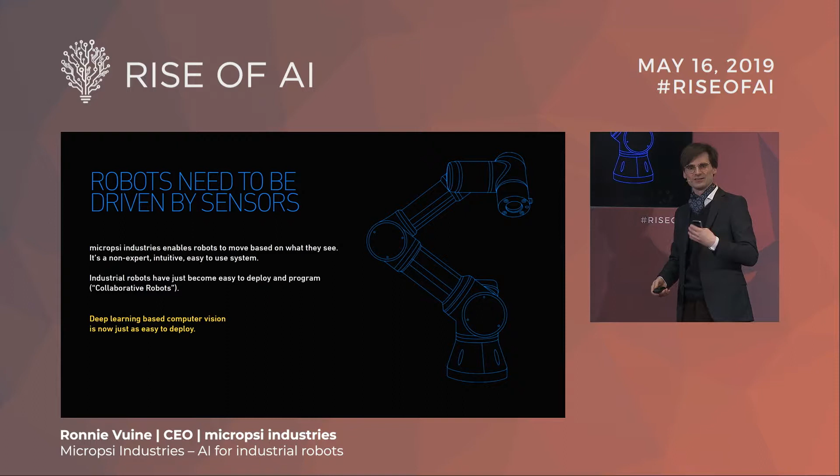And then after a couple of hours of demonstrations where the robot makes the movement with the trainer and us watching, the data gets sent off to the cloud, and back comes a policy that knows how to make the right movement given any of the images that you show. And the robot can make this very complex, real-time correcting movement on its own.

So before I show you an instance of this, I will have to do a great deal of explaining of what it is that we're doing there, because production is always very special. Just the general setup of the system: you buy a robot, any robot, we don't make the robots, right?

We're a software company. You buy a robot, for instance, from Universal Robots, you buy a force torque sensor so you feel the forces on the wrist, you get a camera from us and any type of end effector. You connect all these, and there's a tablet app, and it's really simple to use. Anybody in this room could train a robot to do a very complex movement and to solve a very complex computer vision problem in production. It's really, we made it super simple to use.

You connect all these, you do 2 hours of training, wait a night, try it out. Typically, you iterate this 2 or 3 times, and you're done. You have a very complex, real-time controlled, vision-driven system that knows how to find and position an end effector towards a visually perceived goal. Okay, this was all the technical terms in one sentence.

So we've done that. Let's maybe move over to the video so I can show you how this actually looks when you do it. So while the video starts playing, I'm going to explain to you what we're doing there.

Imagine you're a factory and you make fridges, refrigerators, and you're a premium brand, so you don't want them to break. The premium brand we're working with here is Liebherr. What you need to do is make sure no coolant leaks out of the cooling system after production, because if some coolant leaks out after 4 weeks, the fridge will break.

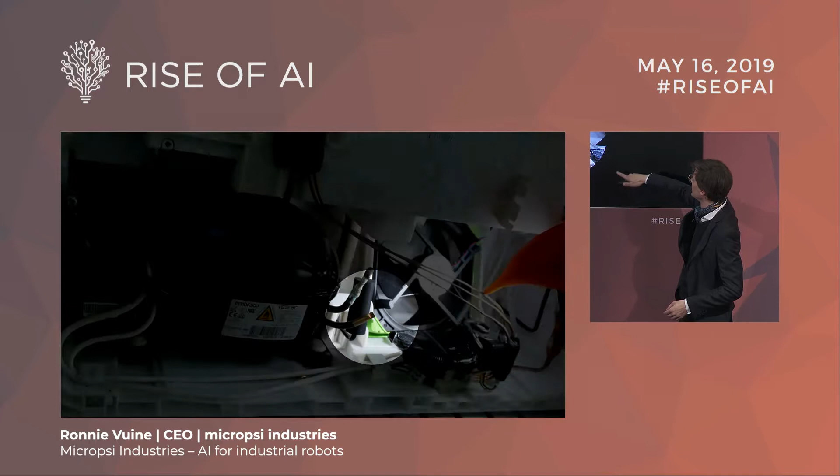We highlight them now, right? These connections, you don't know exactly where they are, you don't know exactly how they look, and some poor dude, his job is to put a sniffing probe, that's a little artificial nose, to any one of those soldering points and try to sniff if some coolant is leaking out there.

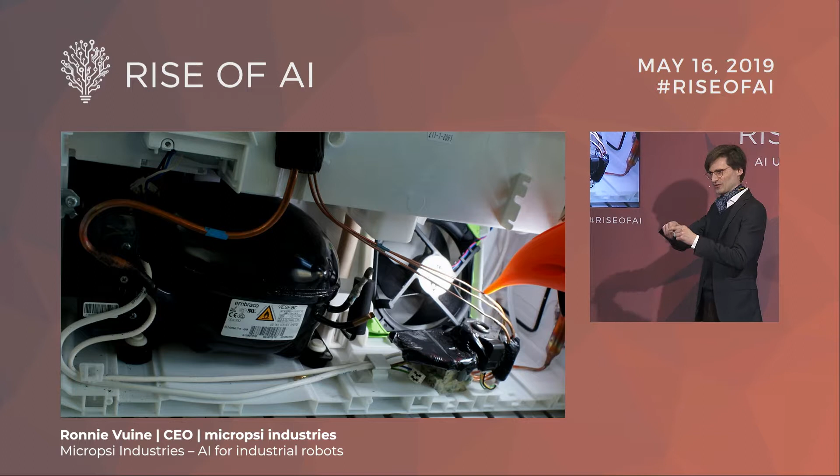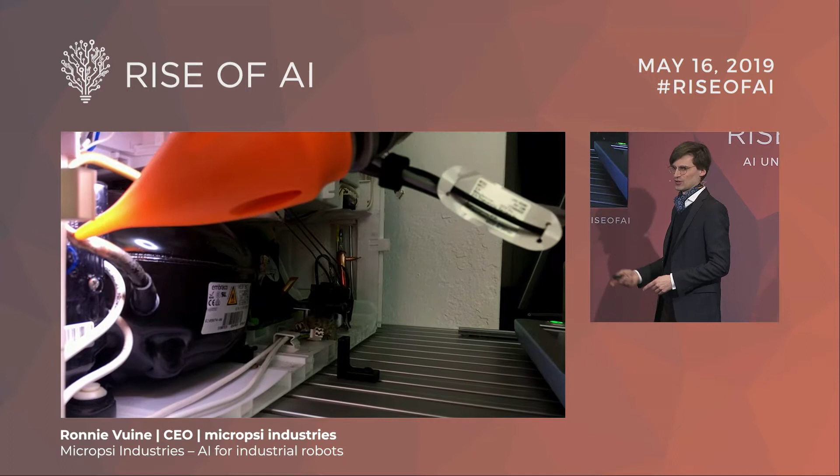Nobody wants to do this, and of course after half an hour they get very sloppy. So Liebherr have tried to automate this for I think 20 years or so, and many people have failed. Now, with collaborative robots and our product Mirai, this was a matter of a week of training the robot.

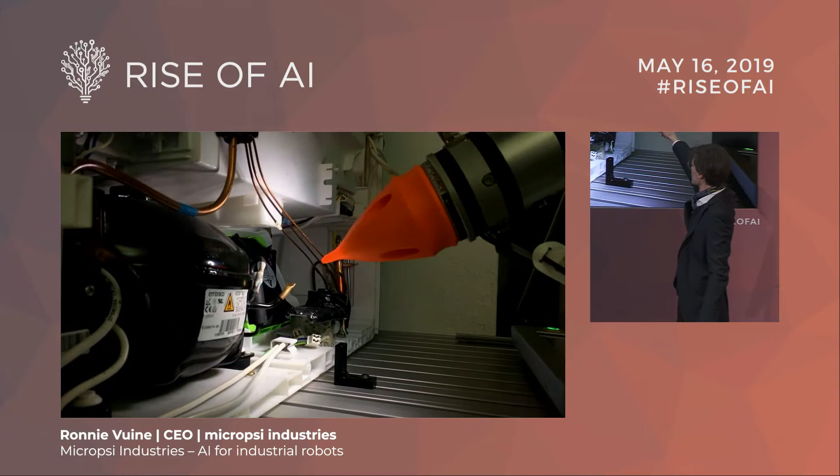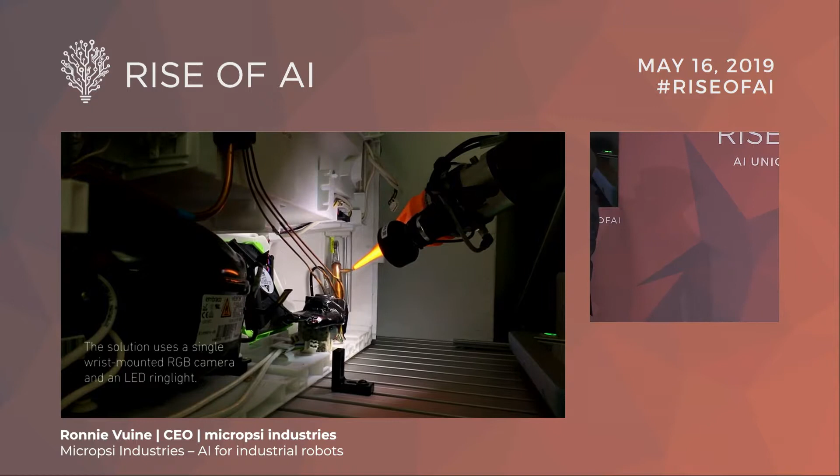So what you're seeing here is a robot. We're quite close, right? This is like this big in reality. This is a simulation of the sniffing probe. We call it den Ameisenbären, you can see why. And this is the camera that watches the scene, and this is the back of the fridge.

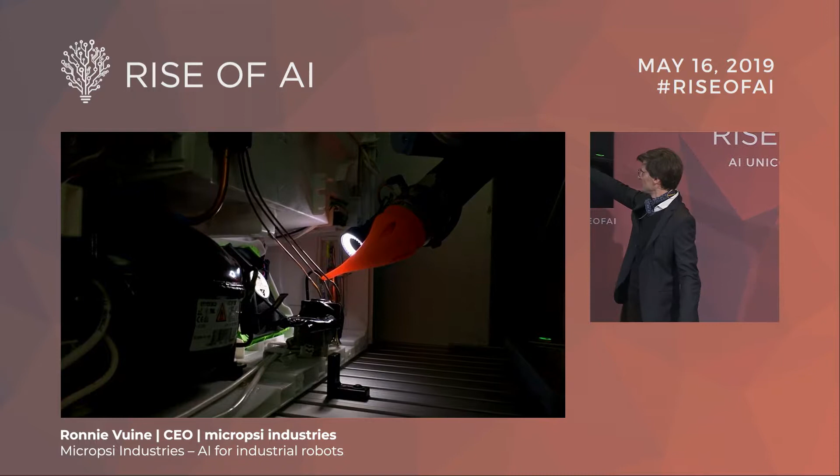With a single RGB color camera, we're going through these movements. So what we did is, for each of the individual joints, we trained the robot to find it and touch it, no matter what it looks like and no matter where precisely it is. We know roughly where it is, right? There's a ball in space where it's going to be, because most of these fridges are similar when we know the model. But really...

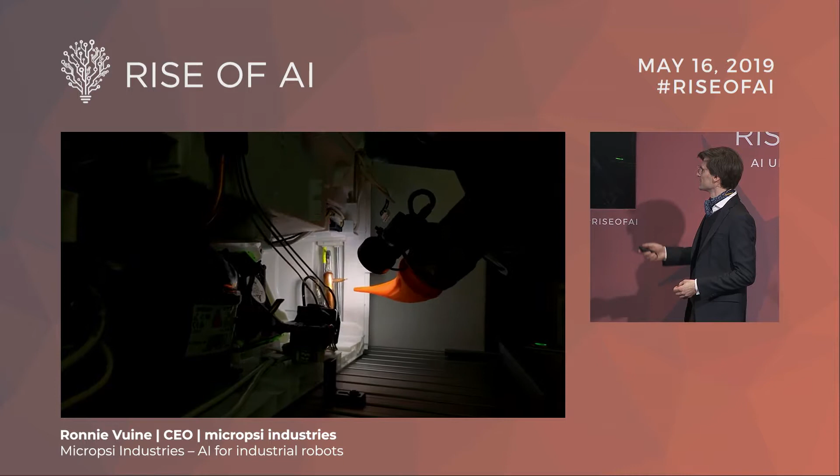The last 2 centimeters of the movement are guided by the camera, and are literally movements like we would make them when we plug in a cable or when we touch one of these things. And the cool thing is this is real time, so you can really mess with the robot as it tries to touch these things, and that's what we're doing in the next 30 seconds.

Right, so this robot just tries to touch the soldering point, and now I'm just wiggling it about to show that that's all this robot wants to do at this point in time. It wants to stay there and sniff it.

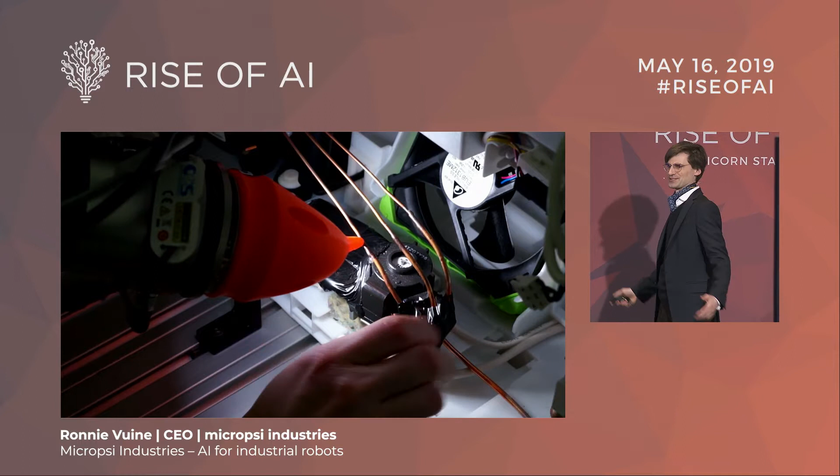That's what's going on. So normally robotics people get very excited at this point because that's completely unheard of and nobody's seen it. Real-time control from cameras with a closed-loop control system is not something that anybody outside research is doing, and we've just productized it. Right now, I believe we're the only people in the world who can do it, especially as a product.

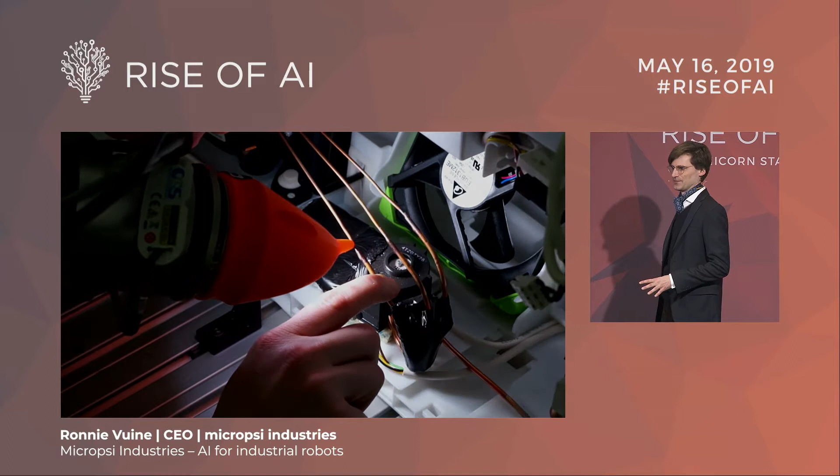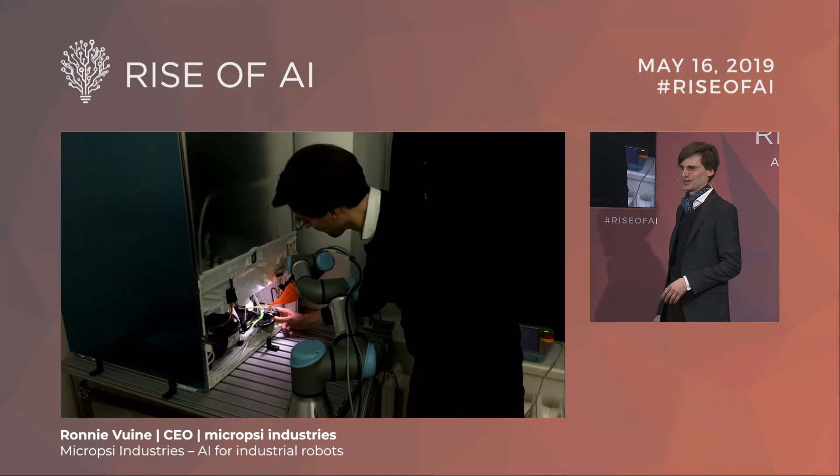And then, while we're messing with the robot anyway, I just said okay, then let's mess with the whole fridge. That's not something that would happen in a factory, and see if it still performs and finds the goal. So that's what's happening here.

Yeah, we need to wait for the video to catch up with me. Right, so robot wants to touch, and then I decide okay, let's move that thing about, and it just does it. I think we'll see one more example of this. It moves to the right.

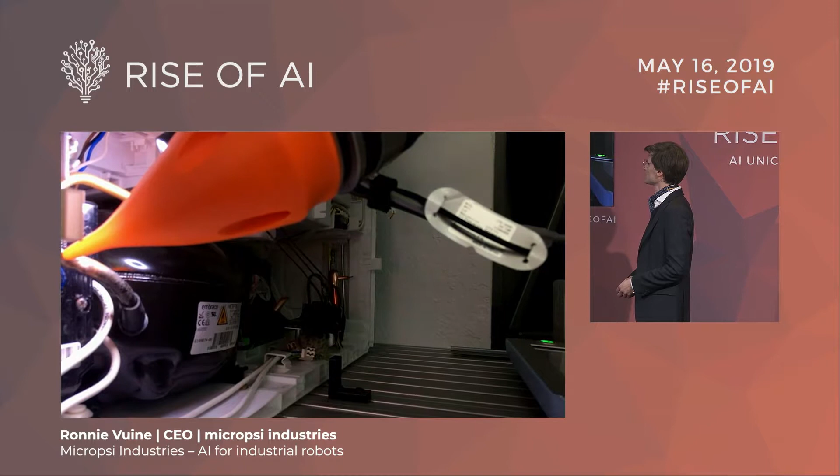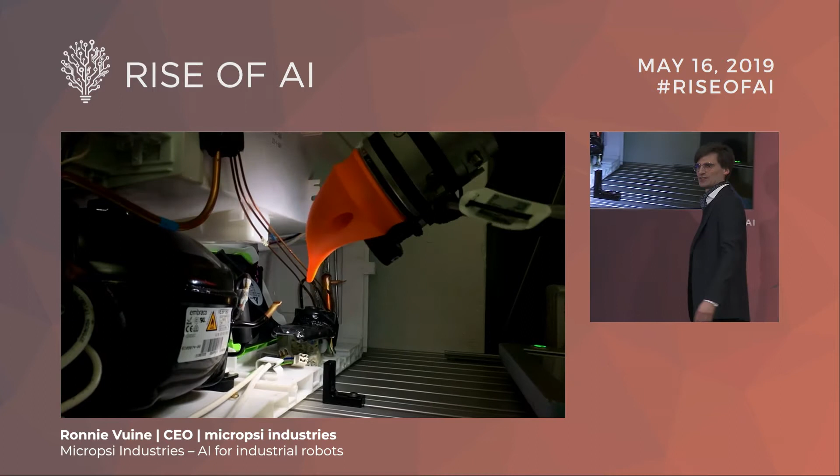Yes, and now I just hit it hard, and the robot, it needs to go here in this case. Right, and it just approaches, and even as we wiggle it while it moves, we go there. Okay, the rest is technical stuff and boring, so we should go back to the presentation.

So this is not about sniffing fridges. The world market for the sniffing fridge application is maybe 15 installations. I mean, there's one at Liebherr-Miele, there's one at LG, there's one at Whirlpool. We're talking to all of them after we've done that.

So this is not what it's about, right? This is a highly horizontal product. It's as horizontal as universal robots themselves are. What we do is we take the AI to the actual factory, record the data on site, and solve whatever the movement problem that they have there is.

So we're not, unlike Alexa, where Amazon has trained something and deployed the result. What we're doing is we're deploying the learning system, take it to the factory, record the data there in a very specific manner to the workplace there, the lighting conditions, that there may be oil in the air and chickens running around in the background. You don't know, right? Any of these variants we learn to deal with on site. Record the data, bring it back to the cloud, create a policy, install it on the robot, and have it work. And this works for essentially anything where you need to hand-eye coordinate a movement.

So the way we sell this is we go to a factory and we go to the production engineer and tell them, okay, now let's go through the factory and you show me the people you keep around where you didn't automate. The people you keep around is exclusively for their ability to coordinate how they move with what they see. Because all of this could be done with a robot instead of a person.

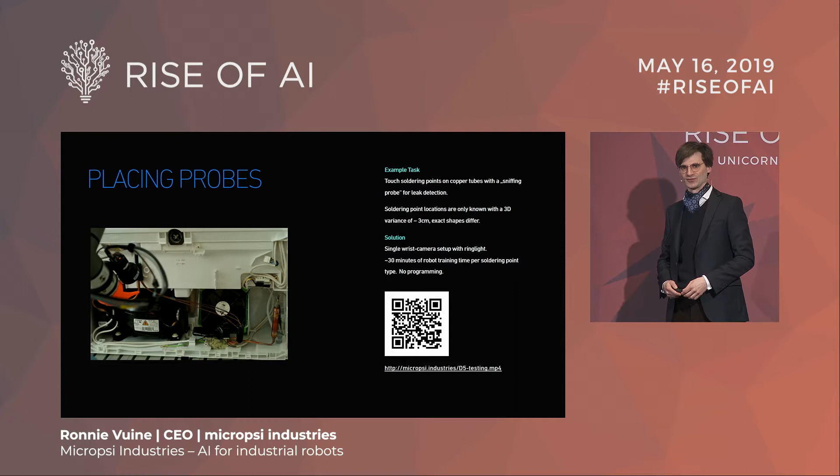We can do this with essentially all the Universal Robots machines. There are 6 of them right now, 3 different sizes, and then slightly different equipment.

If we need more speed, more power, and a bit more danger, we can also do this with ABB robots. We're in no form bound to collaborative robots—it just happens to be the case right now. The market is crazy about them and buys Universal Robots in large numbers. So most of the requests we get today are not for traditional ABB fast machines, but for non-dangerous Universal Robots machines.

Two words about the company. We've been founded in 2014. We're sort of a weird animal.

We're really AI people. So the discussion about artificial general intelligence and how to make language understanding, or understanding anything at all instead of just predicting stuff, is really close to our heart. And it's really long-term what I want to do in my life. This is essentially a vehicle for me to make some money on the side.

We spent 2 years, between 2014 and 2016, figuring out how doing AI in Germany makes sense. If you do AI and you have a bunch of good people and a bunch of algorithms that make sense, how do you do something where you learn from the people around you? Wouldn't it make more sense to do this in Israel, Silicon Valley, or at least the UK? Industrial robotics or production topics are sort of a natural match for us, and that's how we ended up doing this. We're 20-ish people now in Berlin with a sales office in New York.

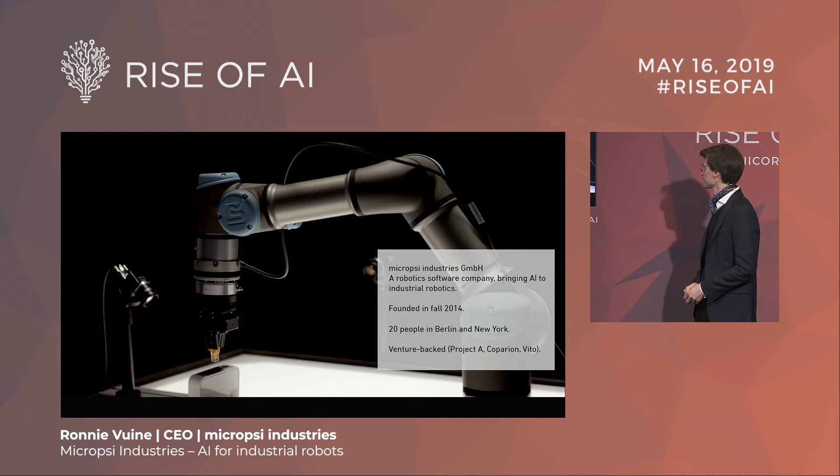We're venture-backed by Project A, who invested in November last year, Coparion, and Vito. All of these guys are very good operationally, which helps us a lot, and these guys obviously are close to just production issues and help us a lot there.